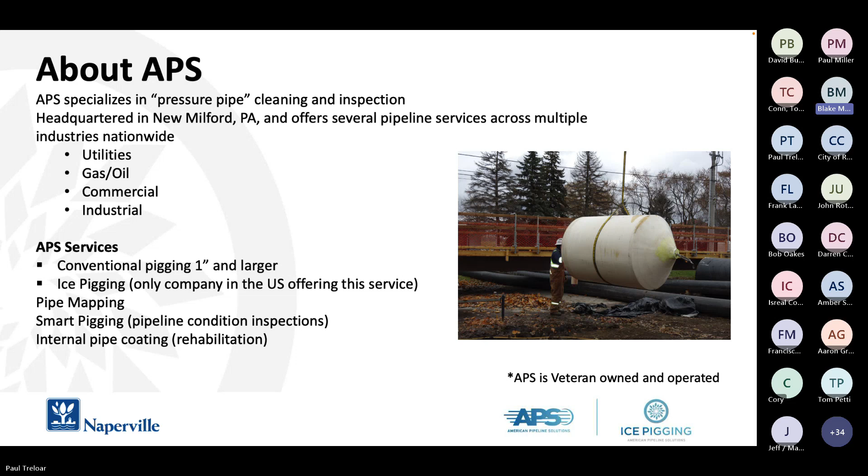Our goal is to pair each of these offerings and technology with someone who's actually utilized that technology in the past, so you're not just hearing from the service provider, you're also hearing from the client themselves, such as Tony Conn. So without further ado, I'd like to hand it over to Paul Treloar, our head of ice pigging.

Hey everybody, Paul Treloar. I come from the UK, born in England, joined the Marines out of school, and after the Marines joined Bristol Water, where ice pigging evolved sometime after I joined, and that was how I got into ice pigging. Came over here with ice pigging with a company called Suez in 2012, and moved down to Florida and joined American Pipeline Solutions in 2020 when they took over the ice pigging services. So, Tony, I'll let you introduce yourself.

Thank you, Paul. Good afternoon, everybody. As Paul and Blake said, my name is Tony Conn. I'm the Deputy Director of Public Utilities, in charge of water operations for the city of Naperville. Water operations meaning water supply, water distribution, wastewater collection and pumping, and stormwater pumping. This is my 33rd year with the city of Naperville. I've got 40 years of experience.

I don't like advertising that, but in the water industry, I'm an IEPA, Illinois Environmental Protection Agency, certified water and wastewater operator. Also NASSCO certified in PACP, LACP, MACP, and both of the ITCP manhole rehab and cured-in-place inspections. Member of a lot of trade organizations and also a member of the Illinois Water Environment Collections Committee.

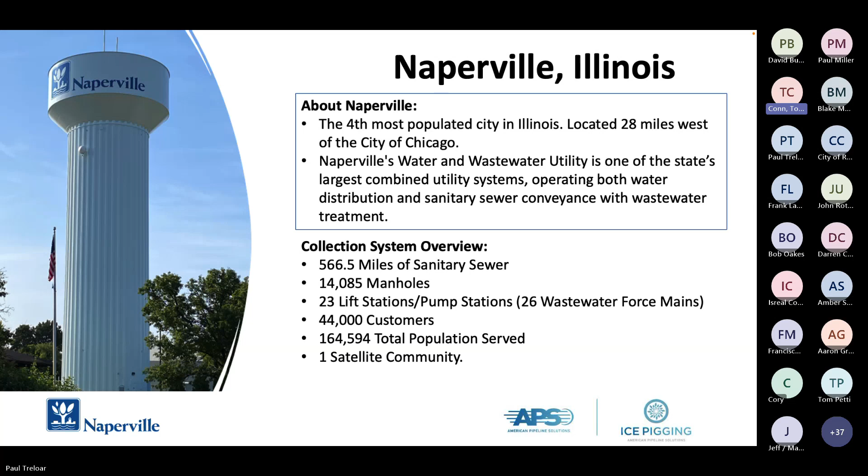Quick overview of the city of Naperville's collection system. We have just under 567 miles of sanitary sewer main, 14,085 manholes in our system, 23 wastewater lift stations. Of those 23 wastewater lift stations, there's 26 force mains, meaning some of our largest pump stations have 2 force mains leaving them. We also have 44,000 customers, and we serve a population just shy of 165,000 people. And we also serve the wastewater for one satellite community.

Little background. As we all know, force mains are a critical asset in the wastewater collection system, and they're often overlooked. In 2021, the City of Naperville Water Utility did a pilot program to perform an internal condition assessment of a force main that was installed in the 70s. Keeping in mind the station was originally an old dry pit station that was converted into a submersible station.

Working with a collection system engineering firm, and after reviewing several technologies, we decided that the Ingu Piper system would be the best system to perform the internal inspections of all the force mains and get the deliverables that we were looking for. The Piper is free floating, detects leaks, looks for air pockets, gross wall thickness changes, pressure differentials, and blockages. And with the pilot and the other programs that we used with the Ingu Piper, we found considerable amounts of debris in actually both of our force mains.

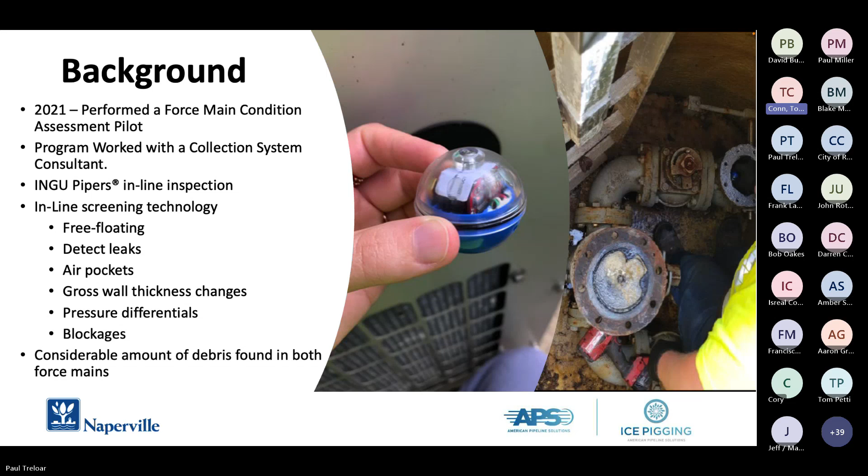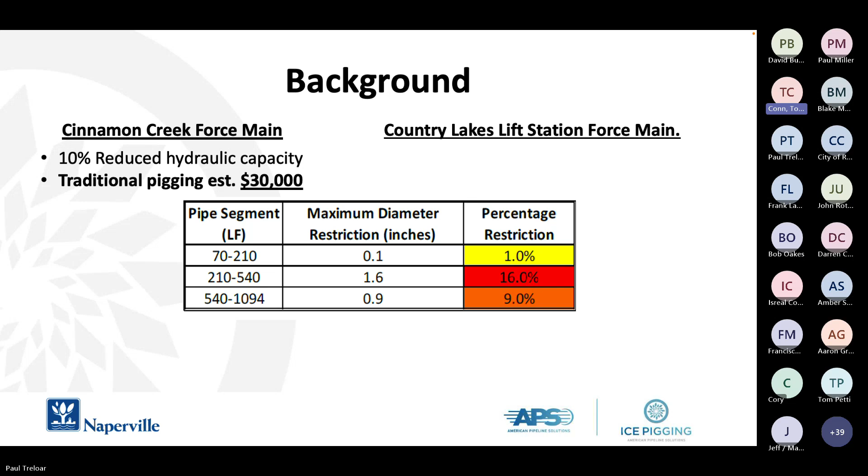A little background on the Cinnamon Creek lift station. This is the first lift station that we originally did a pilot on. This station force main was installed in the 1970s.

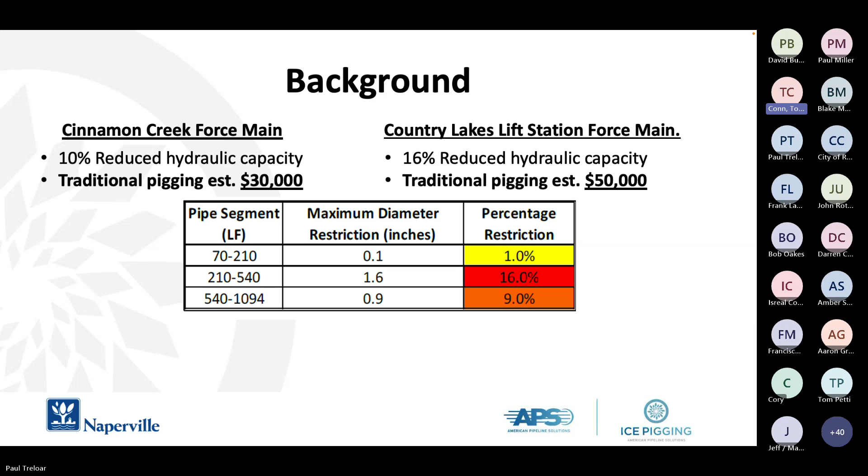In 2021, the following year in 2022, we did perform the same test on Country Lakes lift station. In that one, we also found a 16% of debris buildup in that force main. In the table in the middle, you can actually see what you receive from the Ingu Piper. It's capable of pinpointing where in the pipe, linear footwise, where the debris starts, kind of calculates the percentage of the debris and all the way to the end of the pipe.

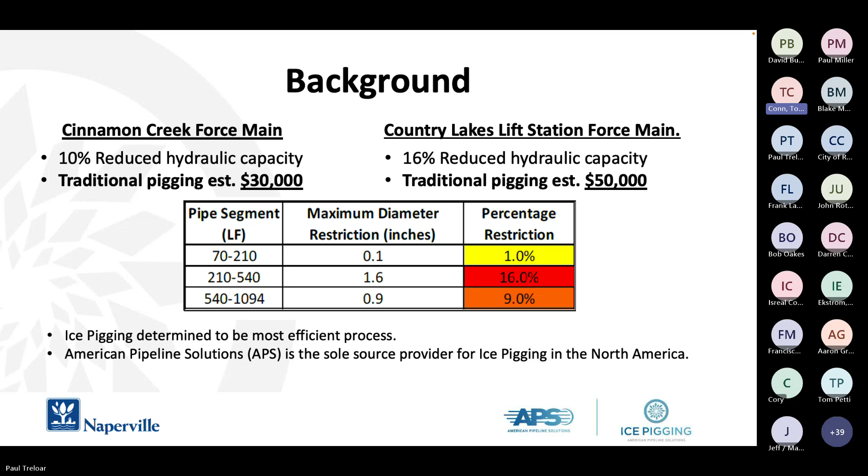After doing this work, reviewing all the data and everything, it was determined that ice pigging would be the most cost-effective way to remove that debris. We reviewed the data and some case studies for traditional pigging and some of the information for ice pigging, and we decided to move along with the ice pigging program for both force mains. American Pipeline Solutions was the sole provider in North America, so we worked with them for the force main cleaning ice pigging program.

Thanks, Tony. So what is ice pigging? We like to call it advanced pipe cleaning technology. Of course, it improves water quality when cleaning drinking water, as it was developed on drinking water. In sewer force mains, it's more of a tool for increasing flows and improving pumping performance, etc.

So it was developed by Professor Joe Quarini from the University of Bristol. He came to the company I was working with, Bristol Water, a water supply company, and said he had this idea of using ice to clean underground pressure pipes. He wanted to use Bristol Water's underground infrastructure to practice and develop this technique. And that's what happened. This is going back over 20 years ago now.

I was not part of it initially, but I was watching from the sidelines as several of my colleagues were involved, and I had great interest in it. I got involved once the technique had been perfected, and it was then put under a license; using ice to clean pipes was a patented process. And as Tony said, American Pipeline Solutions are now the only company offering it in the USA. It was introduced in 2012 when I came over here to introduce ice pigging, and I've been here ever since overseeing it.

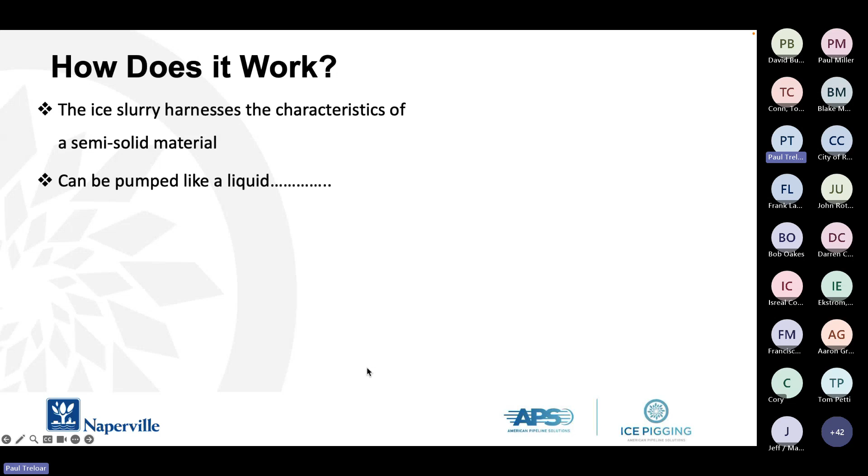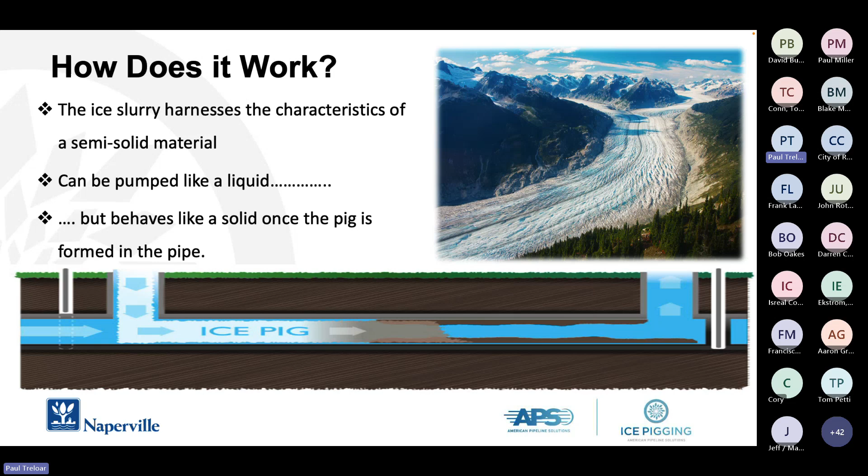So how does it work? We have this semi-solid material that can be pumped like a liquid. You see that glacier there; I want you to think of that for an ice pigging project. When we inject the ice into a pipe, it doesn't so much bulldoze or snowplow any sediment or grease and fats and oils in that pipe. It doesn't push them up front like a solid mechanical pig would, but more like picks them up in the body of the ice, much like a glacier forming valleys and picking up rocks and stones as it moves through. This semi-solid material can be pumped like a liquid, but it behaves like a solid when it's in the line.

Once we pump the liquid ice into the pipe, it forms as a pig. We don't look to fill a pipe with ice. We don't have enough ice for that. As long as there's enough ice to go from the injection point to the predetermined discharge point before it all melts, then that's fine. So we're usually looking for a certain percentage of any pipe dependent on pipe material and pipe size. We can then figure out how much ice we need for any pipe that we're trying to clean.

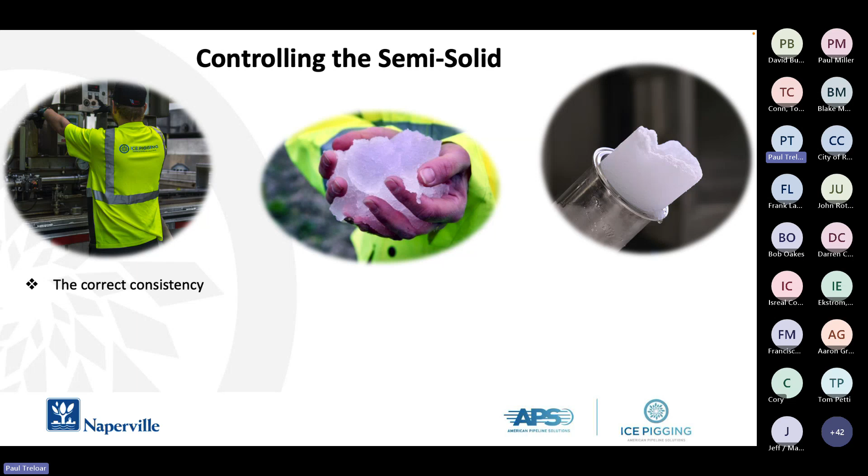So how do we do that? Well, we have to control it. If we froze water on its own, it would be solid ice, and it'd be very difficult to pump solid ice around the system. So we had to come up with a freezing point depressant that was safe; it had to be NSF approved because initially this was developed on drinking water. So we came up with food grade table salt, made a brine solution, and were able to freeze this down to about 24 degrees.

So it was really cold in the pipe. The colder it is, the longer it's going to last as ice, the further it will travel, and we'll get more cleaning coverage per batch of ice that's made. And because it was just food grade table salt, always mixed with fresh potable drinking water, it was going to be harmless to customers should any get up into their service lines.

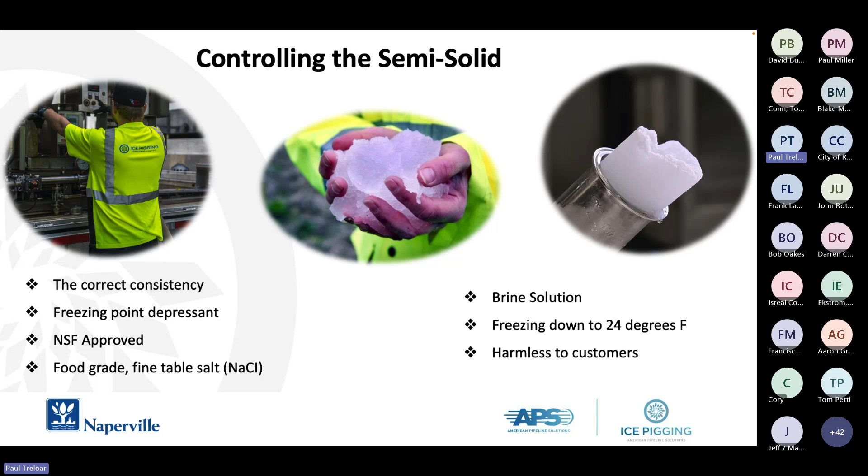So ice pigging, I'm not going to sit here, none of us will sit here and tell you that ice pigging's the perfect tool and it's the silver bullet of pipe cleaning, because it certainly isn't. But it's a very, very good tool to have. It's a very useful tool to add to other tools like mechanical pigging, jetting, etc., or hydrojetting and mechanical conventional pigs.

But some of the benefits of ice pigging are, for a start, it's easy to get access into the pipe. We nearly always use existing fittings on the pipe. To get the ice into the pipe, because it's just like a liquid, we just need a 2-inch port. So quite often we'll use a fire hydrant, a blow off, a clean out, a pump bypass, an air release valve. We can unscrew an air release valve and screw our hose onto that. So there's usually existing fittings to allow us easy access to get this ice into the pipe.

The ice will pass through plug valves. Many force mains are fitted with plug valves that become an obstacle for conventional or mechanical swabs or pigs. It doesn't matter to the ice, much the same as a butterfly valve on larger transmission mains in the drinking water side. Conventional pigs tend to not be able to pass through these, but the ice will pass through because it really is just like a liquid. And because it is like a liquid, it adapts to change in diameter.

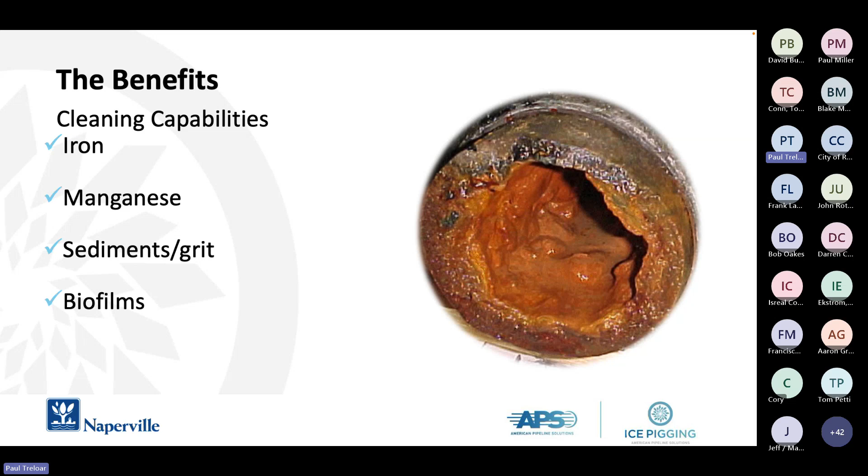More benefits, the cleaning capabilities. Well, if you think of drinking water, iron, manganese, sediments and grit in sewer force mains, biofilms, fats, oils and greases, all the things that you associate with normal underground pressurized pipes in the utilities, ice pigging is generally going to be a very good tool to remove all of these things.

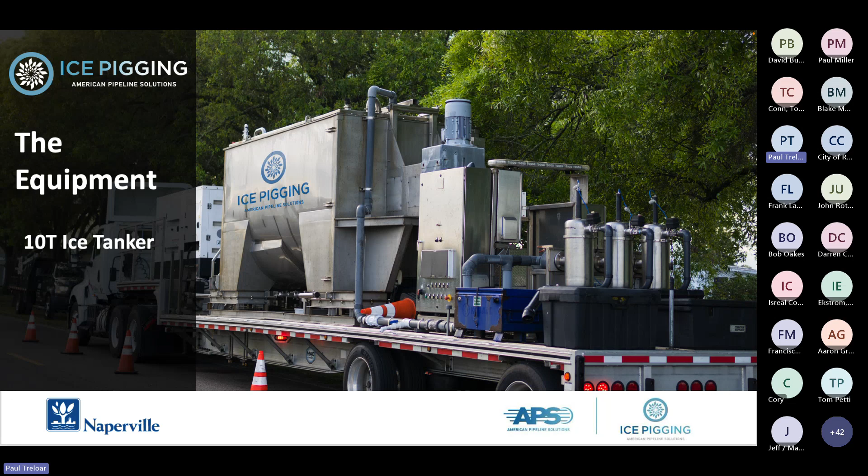The equipment, I just want to show you some of the equipment here. We have our ice tanker, which carries the equipment, and the ice machines are on a separate trailer. You can see a bank of ice machines there. And in ice production mode, the tanker on the left there is filled up at a local fire hydrant with drinking water. We add food grade table salt to it, and then it's connected up to the ice machines.

You can see here on the right hand side these white upright cylinders, and you can see these flow and return hoses here. So once we have the brine filled up in this tanker, we start the ice machines. They suck the brine out of the tanker up through their cylinders, and they return that as slush ice into the tanker.

You imagine initially all that does is just start chilling the water that's in that tanker. But over a period of anything between 7 and 14 hours, maybe sometimes even a little longer, depending on the ambient temperature and depending on the starting temperature of the water that we take from a hydrant, which down in the southern states can be quite high sometimes. So anything between 7 and 14 hours it takes to make a batch of ice.

Once the ice is ready in the morning, this happens through the night, and then in the morning we have this 10-ton batch of ice, 2,700 gallons, ready to go out and deliver remotely to site, where we'll have already identified the correct place to inject the ice in at.

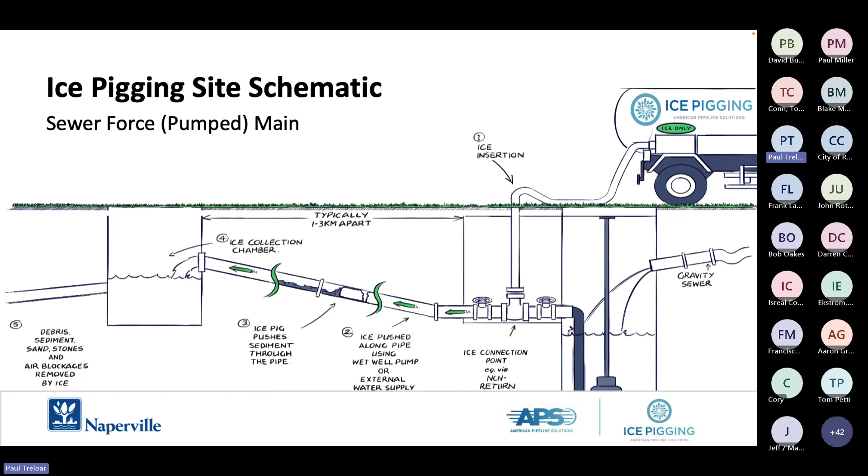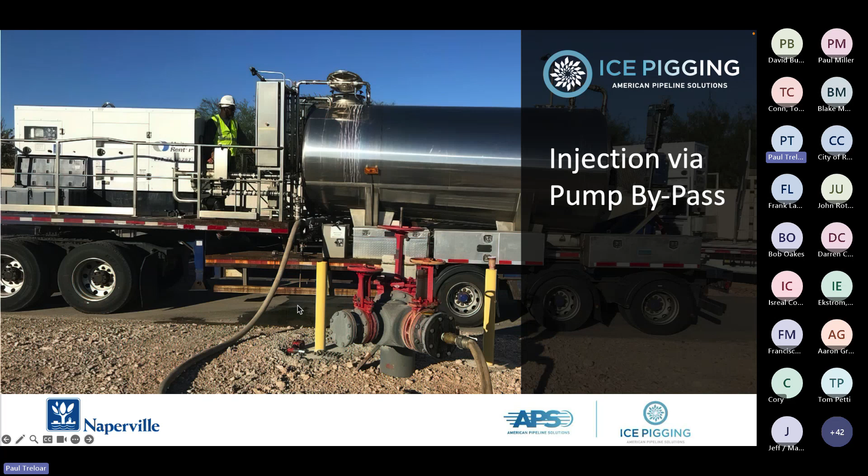That's what it actually looks like. You can see our tanker there in the background, and the pipe is running around out of view here, but that's connected up there. This is, I think, maybe a 16 or 12-inch sewer force main, and this is a pump bypass arrangement here. So our hose was just connected up to a drilled flange here, and it's easily pumped into the system. So no modifications were needed. So that's really how ice pigging works.

I'm going to hand back over to Tony now, and he'll talk through the project at Naperville.

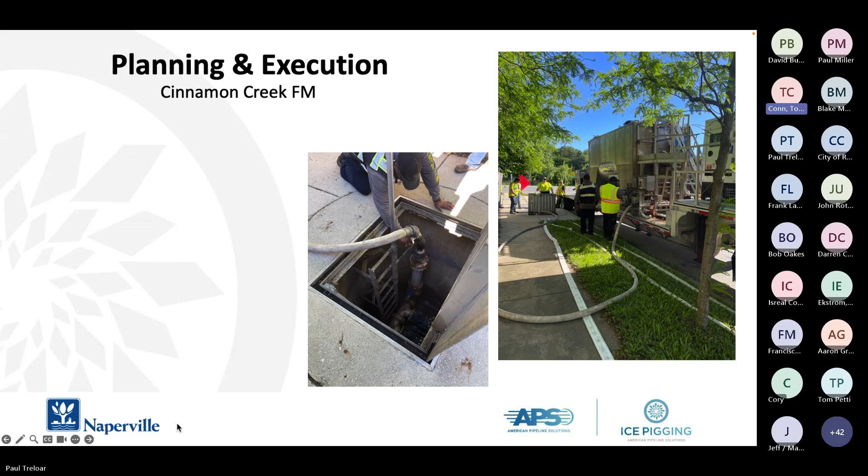Thanks, Paul. The planning and execution portion of both the Cinnamon Creek and Country Lakes force mains, how that really worked was we gave our pump data to APS so they could calculate how much ice slurry is going to be needed for each force main. The Cinnamon Creek force main is just over 2,300 linear feet of 6-inch ductile iron pipe. APS calculated about 1,200 gallons of ice slurry would need to be used, and it was injected into the force main through the station's existing 4-inch bypass located inside the check valve pit. You can see that in the center picture. And the picture all the way to the right shows APS operations injecting the ice into the force main via that bypass.

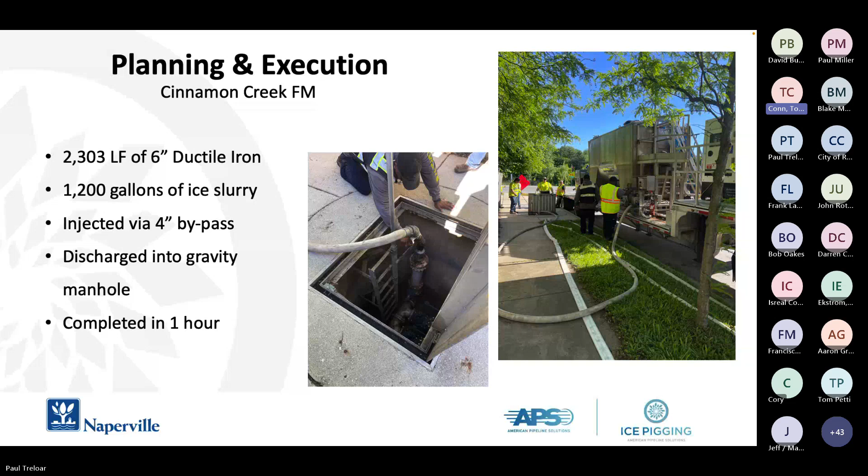How it really works is this: right before we start pumping ice into the force main, the lift station's turned off. We allow the wet well to surcharge to make sure we have enough water to push the ice downstream to the discharge gravity manhole using the existing pumps. So no special equipment other than the ice machine supplied by APS was needed. Once the ice was injected into the force main, the pumps were turned on. The existing wastewater in the wet well was used to force the ice downstream to that discharge manhole, cleaning the force main, and the complete time from setup, traffic control, shutting things down, took just about an hour.

Very similar process with the Country Lakes force main. This is about 1,100 linear feet of 10-inch PVC force main, where APS injected 1,500 gallons of ice slurry into the 6-inch bypass. Same exact thing. The pump station was shut off, allowing the wet well to fill up with wastewater. So when we were done injecting ice, we had more than enough wastewater in the wet well, when the pumps were turned on, to force the ice slurry down through the force main to the discharge manhole.

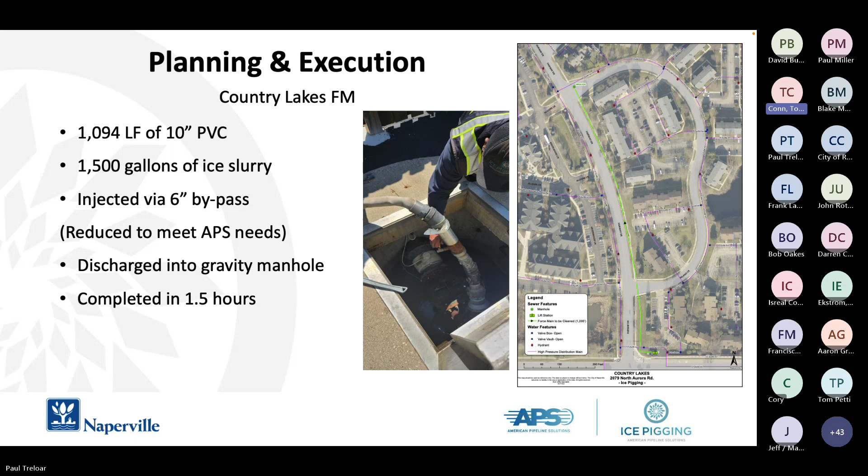Again, for this entire process, traffic control setup was a little bit longer because we had to get some fittings to knock the 6-inch bypass down to fit the APS hoses. It took about an hour and a half. So relatively, both of them, very minimal time cleaning these force mains for the great benefit that we received.

Results: the Cinnamon Creek force main, pre-drawdown test, so pre-cleaning test, and it was also confirmed with the in-line flow monitor. We were pumping normally about 301 gallons per minute. This is pumping left of the design curve. And our run times were running about 1.1 hours per pump.

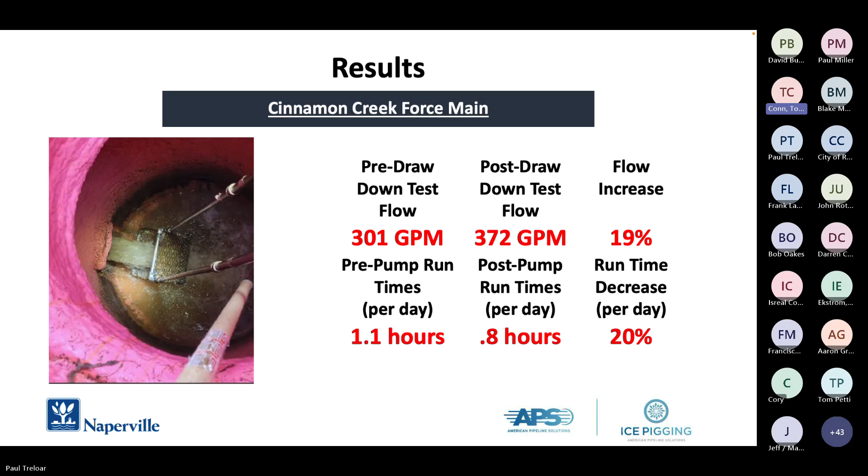After the force main was cleaned, for several days, we monitored how much flow the pump station was able to perform now. And we were able to pick up all the way up to 372 gallons per minute after the cleaning, which put us right in the middle of the most efficient pump curve portion of these pumps, knocking our pump time hours down to 0.8 hours a day. Bottom line is our flow increased about 20% and our run times decreased about 20%.

Very, very good numbers. Similar with our Country Lakes lift station, before the cleaning, the pumps were pumping at 1,100 gallons a minute. These pumps were pumping way left of the curve. And if you understand pumping left of the curve, how much damage that can do to a pump, actually equaling premature failure of the pump system, it was very concerning to us. And also, these pumps were running 5.4 hours a day.

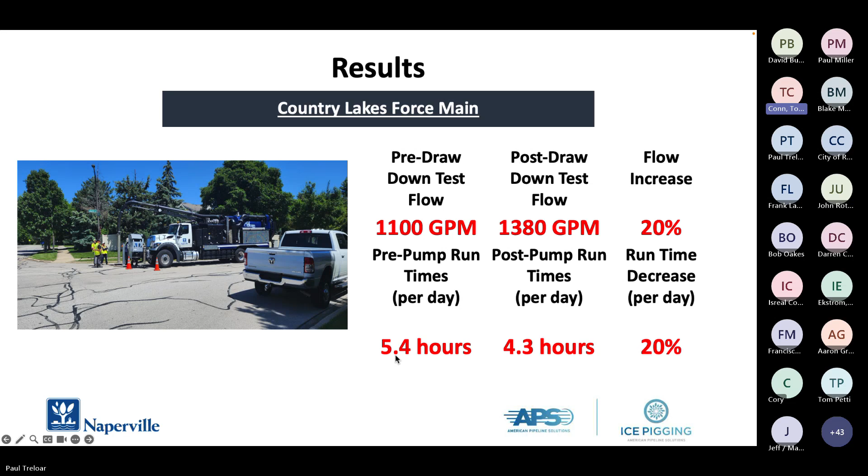But after this force main was cleaned, we did for several days several post-drawdown tests, and we gained quite a bit of flow. We were up to 1,380 gallons a minute. That's exactly the design curve of this pump station. So we brought our pump station back up to its original design curve while knocking our run times down to 4.3 hours a day. Again, flow increased 20%, run times decreased by 20%.

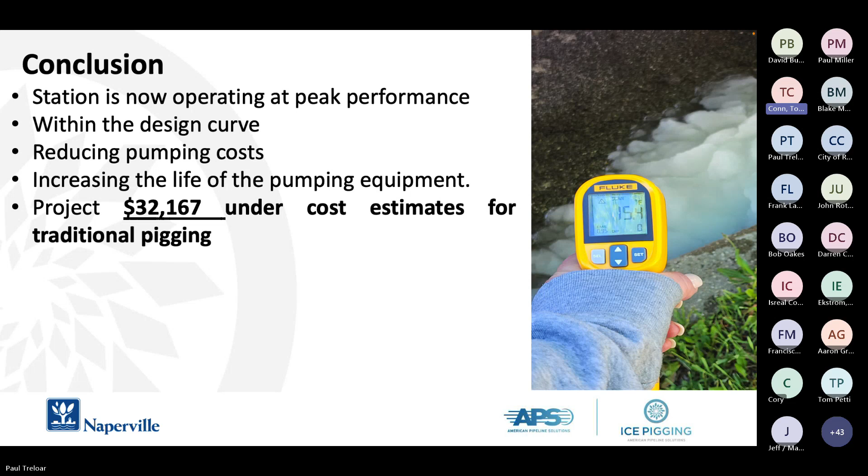Conclusions to our test: we were really, really pleased with the ice pigging, how easy the ice pigging was, how it was able to restore the pump stations to their peak operating performance. Both stations, when the ice pigging was completed, were pumping well within the high performance of their design curve. It reduced pumping cost, not consuming much electricity, increasing the life of the pump equipment. We're doing less maintenance on it. Pumps are doing less run times. Again, reducing electricity, not needing to unclog these pumps as much as necessary when they're running all those times.

The nice thing about it is the project came in about $32,000 under the estimated cost for traditional pigging. And that's actually just the cleaning portion. There's other things you have to do to get it ready for traditional pigging that we did not need to do for cleaning these force mains using the ice slurry.